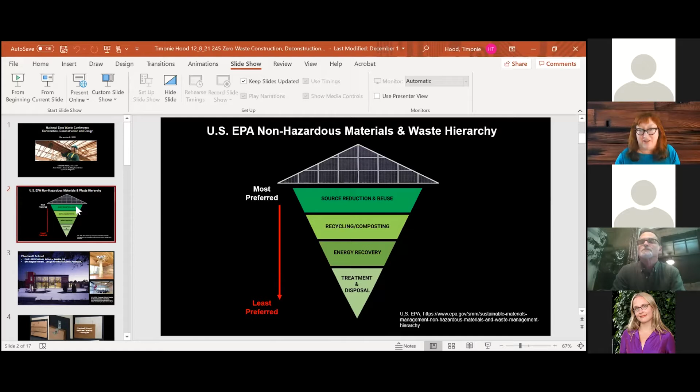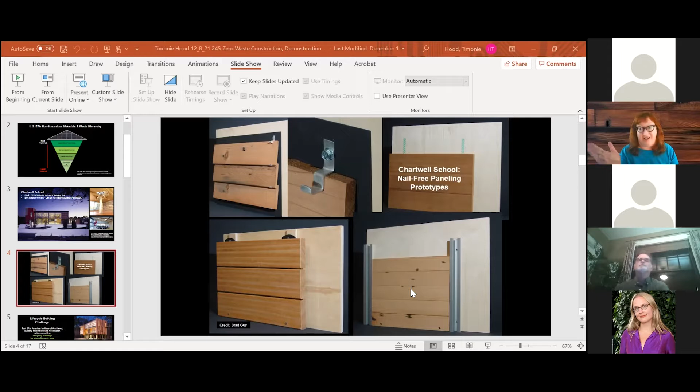Brad Guy, who's a brilliant architect and the founder of the Building Materials Reuse Association, which is now Build Reuse, came up with these ideas for nail-free paneling, because oftentimes the nails become very time-consuming to remove, and they also can damage the lumber. I love this one on top with the adhesive strips where they could just pour an antidote and the wall falls apart. But the system they ended up using, which is very efficient because you don't need many nails or screws at all, is this channelized system.

And we used that handbook to develop a national, and at the end it became an international competition on designing buildings for deconstruction and adaptation. We partnered up with the American Institute of Architects and BMRA, which is now Build Reuse. And the architects and students that participated said they'd never build the same way again.

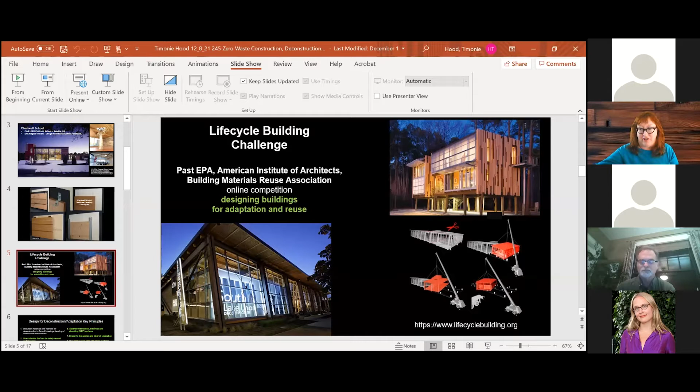The building in the upper right was built on pin foundations, which I think will become more common as we deal with sea level rise and the ability to move buildings. That architecture firm said after running their materials through the greenhouse gas emissions calculator, they'd never build another building the same. The one on the bottom was a building in Seattle called the Pavilion in the Park, and it could be flipped apart essentially and moved as units to other areas. They've taken it apart several times and moved the modules to different places. All of that competition information is still online at lifecyclebuilding.org.

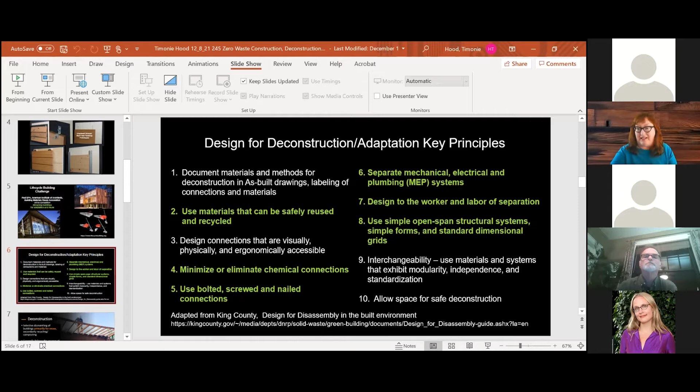So deconstruction can be kind of tricky. What does it mean, design for deconstruction? There's been a lot of great work recently with AIA, but also early on King County and others developed design for deconstruction key principles. A lot of it has to do with having easily accessible connections that can be taken apart, and using safe materials that are high value and can be recycled. So this guidance link, I hope, will help you find out more about design for deconstruction.

Here are the fundamentals for those of you who might be new to this area of deconstruction. It's essentially dismantling a building, so a deconstruction site looks a lot like a construction site. It's primarily for reuse, but it also incorporates recycling and/or composting if there are materials that can't be safely reused or are damaged. Another thing to think about with deconstruction is that it depends on the markets, on the materials in the building, what's going to be reusable.

In many cases, at the very least, pulling out the high value materials, what they call cherry picking, is absolutely appropriate. But sometimes we're seeing 90% plus diversion from deconstruction job sites. And this, of course, reduces the bringing in of new building materials.

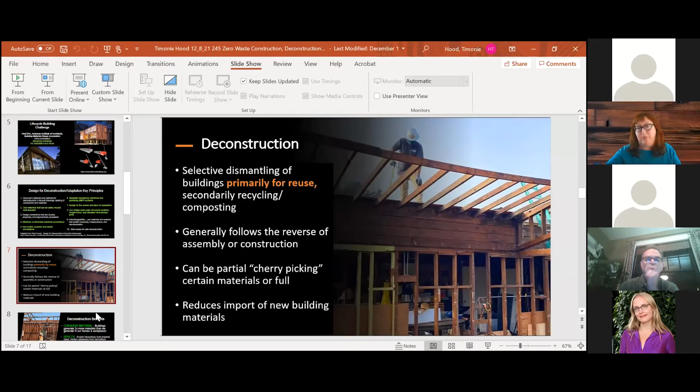So here are some of the amazing benefits of deconstruction. It definitely conserves materials, and EPA estimates that twice as much C&D material, construction and demolition materials, is generated each year than all of what we call municipal solid waste, which is what's generated in our homes, offices, and businesses. So huge quantities of materials. It makes a lot of sense because C&D is so heavy. But the reality is we spend so much time talking about recycling and what goes in which bin, and we may oftentimes be missing entire buildings that are being thrown away.

I think there's also very important work to be shared on the health impacts of demolition, because when homes and buildings are demolished, hazardous dust spreads for blocks, literally blocks, and that gets into people's homes, onto the ground, into the waterways. Deconstruction practitioners have told us that about half the time, even after asbestos has allegedly been removed, they find it under the cabinets, let's say, or inside a wall around pipes, and they're able to make sure it's safely managed. Whereas with demolition, it's not.

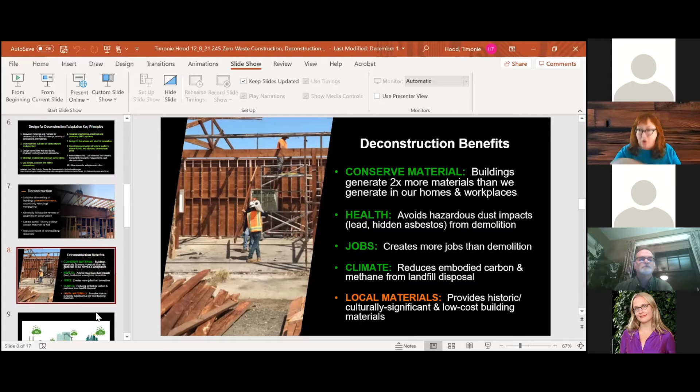It's kind of a common stat out there that deconstruction creates six times more jobs, and those jobs can transition into construction and green construction as well. And then I'm going to talk some more about the embodied carbon climate impacts, and lastly, this local circular economy opportunity to provide low cost, local building materials.

So embodied carbon is a very hot topic, and that means all of the energy and greenhouse gas emissions that went into making, transporting, and assembling a building, versus what you often hear related to climate change in buildings, the energy that the building actually consumes, the operational carbon. As you know, green builders and architects have gotten really good at net zero energy buildings and also at incorporating renewable energy, so what's left is the embodied carbon.

And the government's landlord, the Federal General Services Administration, is calling embodied carbon the next big sustainability opportunity. Just today, the White House issued an executive order on federal sustainability with a focus on embodied carbon. So expect to see a lot more from the federal government, and also many in the green building and architectural world are really focused on these opportunities.

On the deconstruction front, I've been around a long time, and there was a game-changing event in 2016. Portland went out on their own, first in the country, and said no more 'you should deconstruct,' you have to. They passed a mandatory deconstruction ordinance.

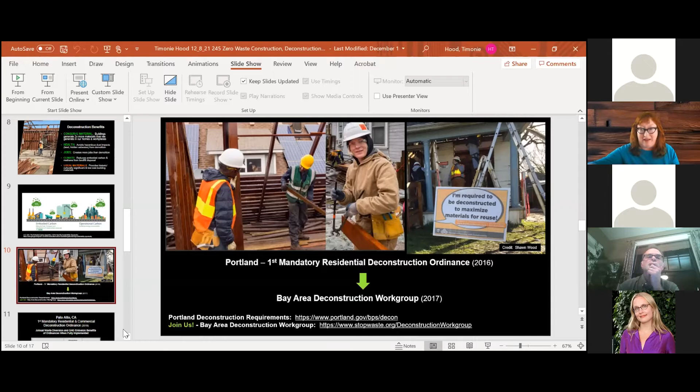It's just been amazing to see the interest and the policy development going on in this area. So expect to see a lot more deconstruction ordinances and policy passing.

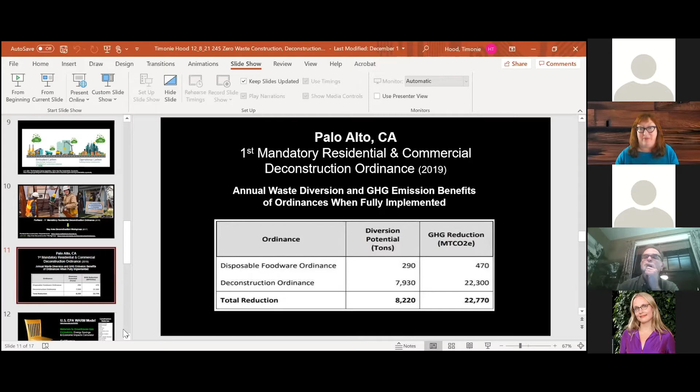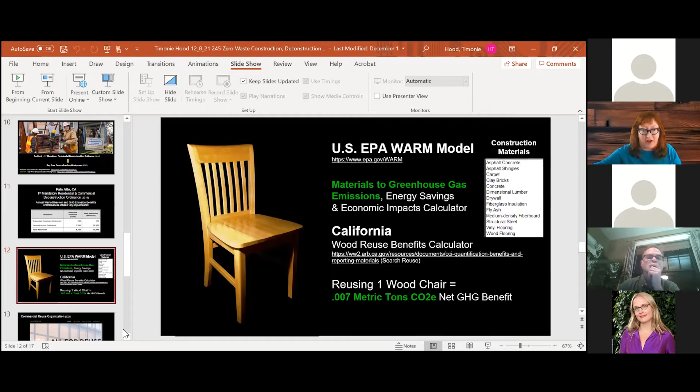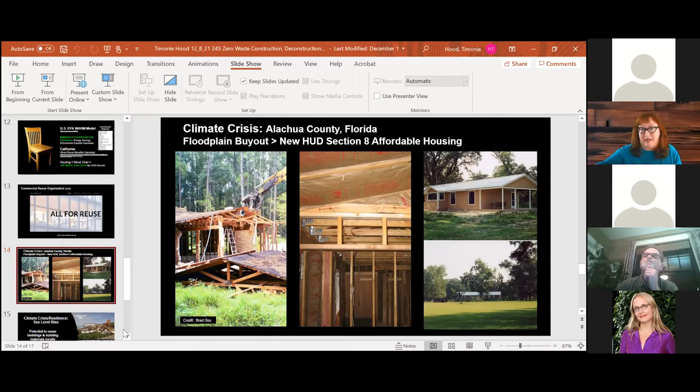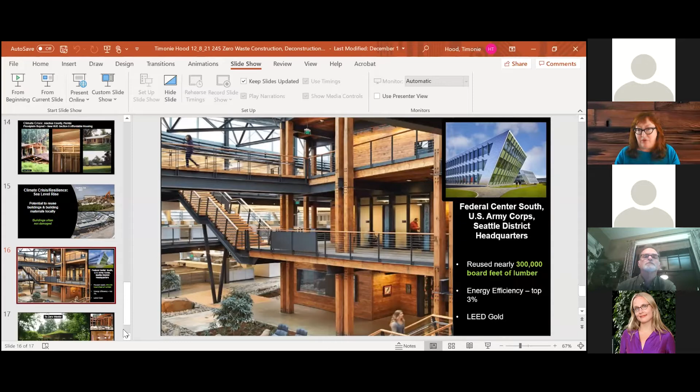I'd like to close out by showing you some beautiful examples of reuse—this is what reuse looks like at scale. There was 300,000 board feet of lumber salvaged from an old warehouse that were used to make the Army Corps of Engineers headquarters building. This is quite a while back, 2012, so this is not something that's a brand new initiative.

And my screen is not going forward here. Let's see, ah, there we go. So why do we need organizations like Build Reuse? And construction junction working on the local level.

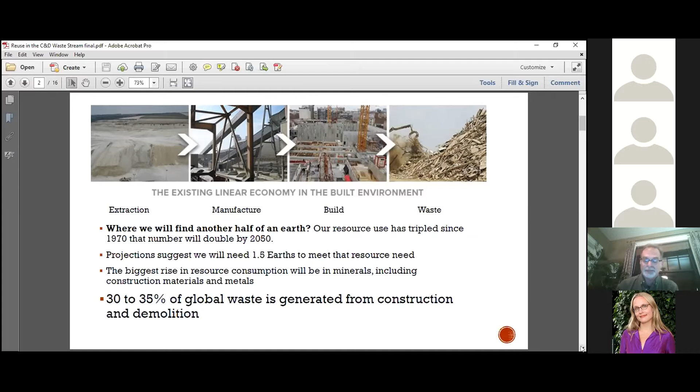So we need to make an adjustment, and we need to make an adjustment to the circular economy. And the concept of circular economy has been really exciting to me as someone who's been involved in the world of reuse for over 20 years, because the central tenet of the circular economy is to keep material in use for as long as possible. And we do that through salvaging, we do that through maintaining, we do that through repairing and remanufacturing. And sort of the bottom of that hierarchy, it's important, but the bottom of that hierarchy is recycling.

And C&D recycling, we're trying to maximize weight. In reuse, we're trying to maximize value. Recycling C&D material is dealing with the really heavy stuff, the concrete, the asphalt, the materials and volume, whereas reuse is really focused on the building material components: doors, windows, plumbing fixtures, lighting, flooring, even down to office furniture and filing cabinets and things like that.

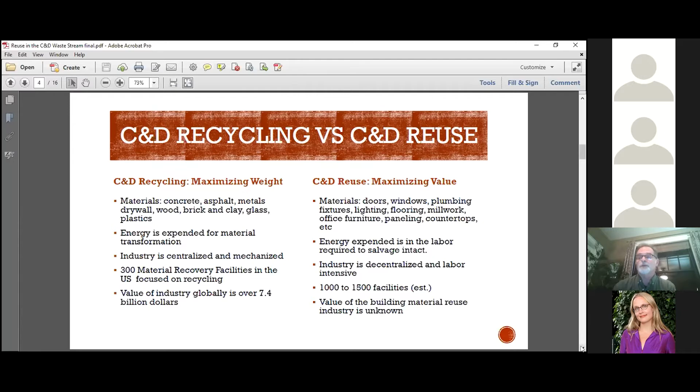We don't really know what the value of the building material reuse industry is. We don't know what's the value of doors that are resold in the United States every year, or the value of doors that we're missing. What value is going into the landfill? We don't have good data around that.

I'm showing this slide to show you the difference. We have really good data on how much concrete is landfilled versus how much concrete is actually recycled and has another life as another part of the product. We know the big stuff. We just don't have good data on what's happening in the building material reuse industry.

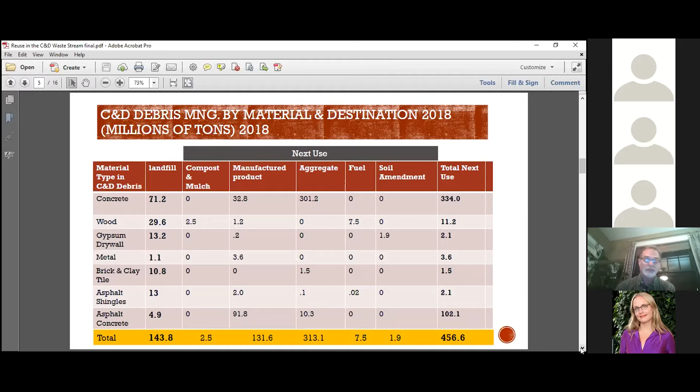And if we don't know the value of that industry, we can't advocate for it. It's difficult to raise funds for it. It's difficult to get ordinances passed. We really need to focus on getting value on this stream.

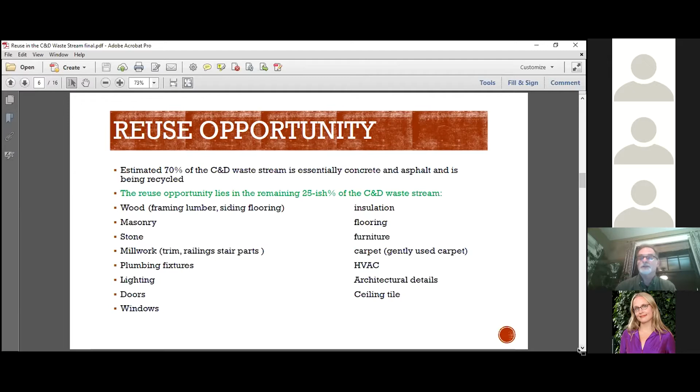When we talk about the reuse opportunity, we're talking about that 25 to 30% of the C&D waste stream that's not concrete and asphalt. Again, plumbing fixtures, light fixtures, doors, windows, insulation, all of the kinds of materials that you will see at organizations like Construction Junction that are nonprofit reuse retailers dedicated to promoting the reuse of building materials.

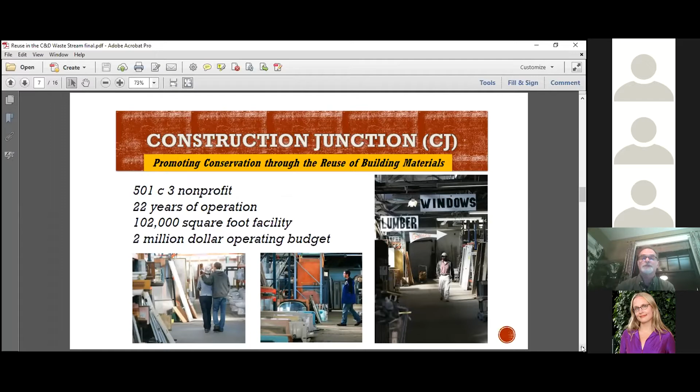We're a nonprofit organization. We've been around for 22 years. We've got a 102,000 square foot facility and a $2 million operating budget, so we can tackle pretty big projects.

The core programs that are part of our operation—the primary core is diversion of used and surplus building materials. We do that through offering a free pickup service. You can drop materials off at our facility. We're open 7 days a week. We also have a deconstruction crew, which Timothy did a great job of showing you some examples of. We fund over 80% of our budget through our public retail sales of donated building materials.

We also have an expanded infrastructure for other reuse and recycling partnerships. We've got operations in our building that recycle bicycles and art supplies. We have a commercial door reuse business within our operation. We have a couple of job training partnerships. Because reuse is so labor intensive, we have a program with Goodwill Industries where folks with disabilities are managing all of our doors and banding all of our tile. We also have a partnership with another community organization that provides deconstruction labor for jobs where we need to ramp up—bigger jobs than our standing 3-person crew can handle.

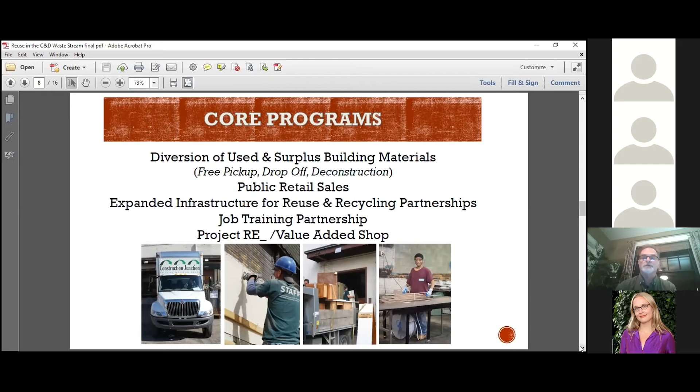What are the impacts of a store like Construction Junction? In 2019, we sold over $1.8 million of salvaged and reused building materials. Our employment opportunity fluctuates between 27 and 32 people. Those don't include our job trainees, which could be 10 to 12 people at a time. We had almost 50,000 customer transactions with about 225,000 items sold.

We processed over 6,000 donation receipts, 20,000 hours of paid training. We also have an inventory system for our organization, so we can track what comes into the building, who donated it, and what we sell. We don't track things by weight—we actually track things by item, so you can see some of the impacts of the materials, how many things we've actually kept out of the landfill through sales.

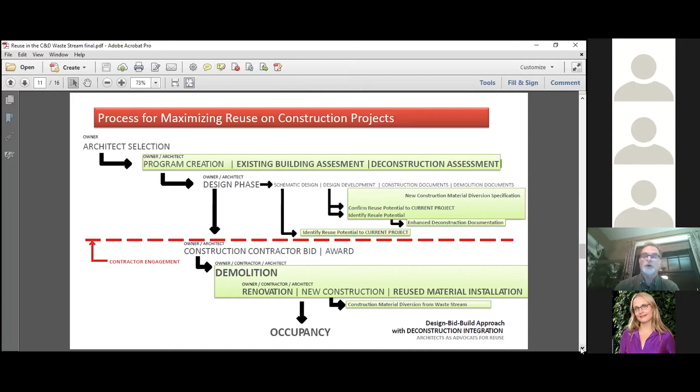They're letting owners know that they can donate materials for tax deduction, that we have the opportunity for deconstruction, that we have a free pickup service, that we can come through and make material lists for the owners so that we can help them manage that material, so that we can help architects create specifications so that everybody on the job site knows that Construction Junction's coming onto the site - here's when they're coming, here are the materials that they're taking. This is a really critical component of working on these larger scale projects.

I'm not going to go through the specific details again, just want to let folks know that I've outlined the key challenges for owners in a lot of these projects, and what are the benefits for owners to be involved, key challenges for architects, and also how to make architects aware that there is the opportunity for Construction Junction to come and reuse materials, and work, and their role in making sure that this happens.

Same things with key challenges for contractors, scheduling us being on the site, scheduling deconstruction, scheduling material pickups. Who's doing the work on the job? Is it going to be Construction Junction? We're not a union shop, so sometimes we've got to work with local unions to actually pull material, and then we come and pick that material up. So all of that has to be coordinated. We've been really successful doing that kind of coordination with the University of Pittsburgh, for example.

The last part of this that I want to talk about is the importance of innovation in the reuse retail world, the facilities that do building material reuse. One of our signature programs that Stephanie was also mentioning is Project Re. This project reuses materials, rebuilds communities, and restores lives. It specifically works with architecture students on design build projects and exposes them to doing design and build work with salvaged and reused materials.

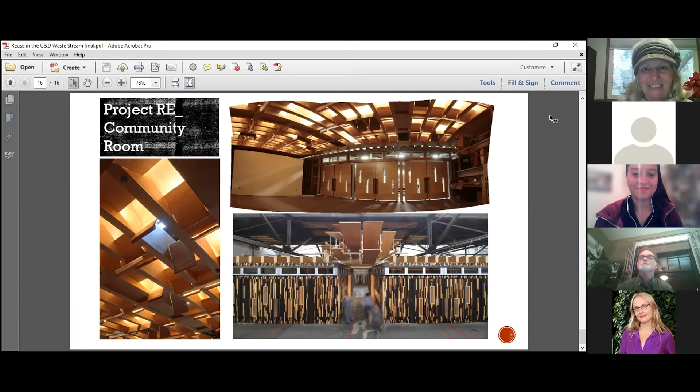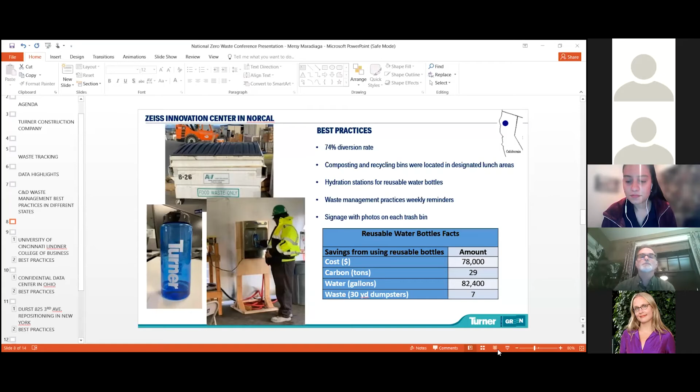Mike, you might need to stop sharing. How's that? Great, and now Mersy can share her screen. Terrific. Let's see, Mersy, I think you need to hit slideshow or full screen. Oh, okay. There you go, fabulous. Can you see my slides? Yes, looks great. Okay, perfect.

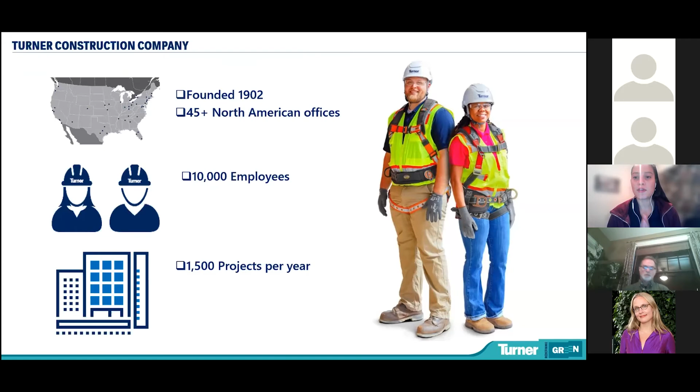Okay, so on today's agenda, I'll be talking about waste tracking at Turner Construction, some of the data highlights, and waste management practices in different regions around the nation. To give you a little background about Turner, we were founded in 1902. We have over 45 offices in North America with 10,000 employees, and we implement about 1,500 projects per year, ranging from stadiums, airports, hospitals, schools, from renovation to ground up, working with clients on the private and public sector.

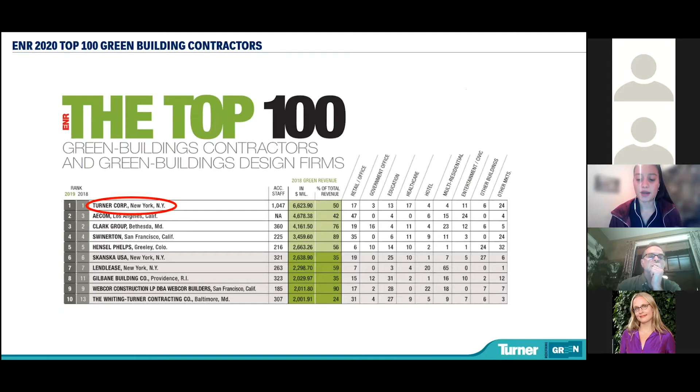A fun fact about Turner is that for the last 14 years, we have ranked number 1 green contractor per ENR, and this is the latest report on 2020. We really take sustainability practices to heart, and one of the sustainability practices that we'll be talking about today is our waste management practices.

Our waste tracking tool is called Turner Tracker, where all of the projects around the nation are required to input all of their data onto the system so that we can see how we're doing as a company. Through this website, we're able to input waste management for each project, where we input what the expectations are towards the haulers. Each hauler is required to input hauling tickets into the website, and a Turner representative gets the chance to either approve or reject them.

From here, we also get the chance to convert tonnage to greenhouse gases so that we can understand the impact that we make as a company. These calculations are done using the EPA WARM model. For the past 15 years, we have had the commitment to reduce 50% of the waste materials that goes into the landfill.

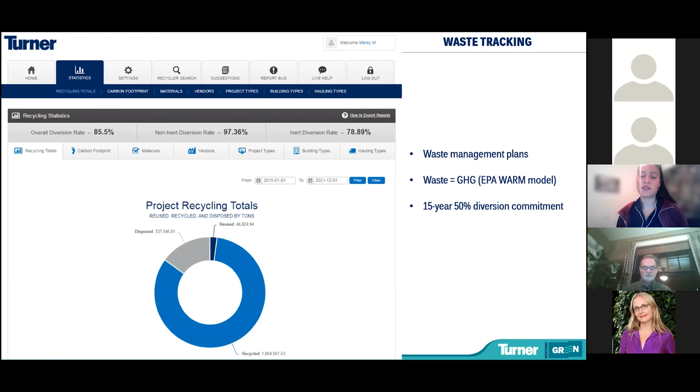Some of the data highlights that we have been able to discover through the use of tracking our waste data has been that 2 million tons of greenhouse gases have been saved. To put it into perspective, that's as if we were to have stopped driving 435,000 cars for 1 year.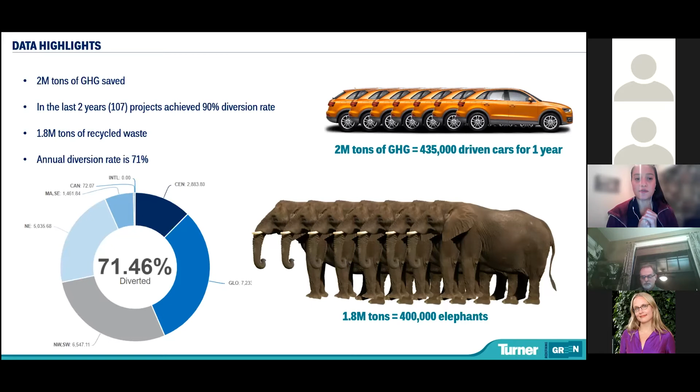In the last 2 years, we have also achieved 90% diversion rate and higher for 107 projects around the nation. We have also recycled 1.8 million tons of waste, which is as if we put the weight of 400,000 elephants. This has led us to achieve 71% diversion rate overall.

Now, when we think of waste, we know that waste differs from region to region, from state to state, and even city to city. But we have noticed that waste can be dealt with, and we can achieve zero waste practices with the same practices, basically. So I'm going to walk you through different projects at Turner in different regions that have achieved really well with best practices. I'll be starting with a project in Northern California, where we achieved 74% diversion rate by focusing on composting and recycling.

We decided that it was important for us to communicate with the trades on weekly reminders, where we specifically stated where we placed all of our trash bins in the lunch areas, and specifically noted with photos what could and could not go into each bin.

At this project, we also implemented a pilot program where we decided that we wanted to reduce the amount of single-use water bottles that were going into the landfill. So we installed portable hydration stations, and we gave reusable water bottles to each of the workmen in the job site. By doing this initiative, we were able to save $78,000, which also related to carbon savings.

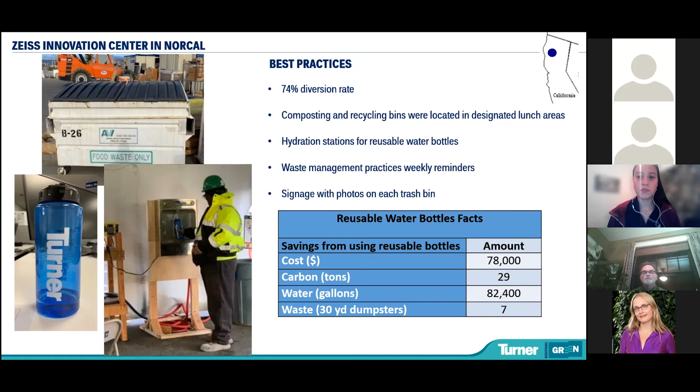Next region is in Cincinnati, Ohio, where the project was able to achieve 95% diversion rate. This was done by focusing on recycling 100% of concrete and steel, as well as reusing pallets, wire spools, and dunnage. We also understand that it's important for us to minimize the amount of commingled waste that is contaminated. One of the initiatives that can prevent that is by separating municipal solid waste and construction and demolition waste. By doing these practices, we were able to save 4,700 metric tons of carbon dioxide, as if we wouldn't have driven 1,000 cars for 1 year.

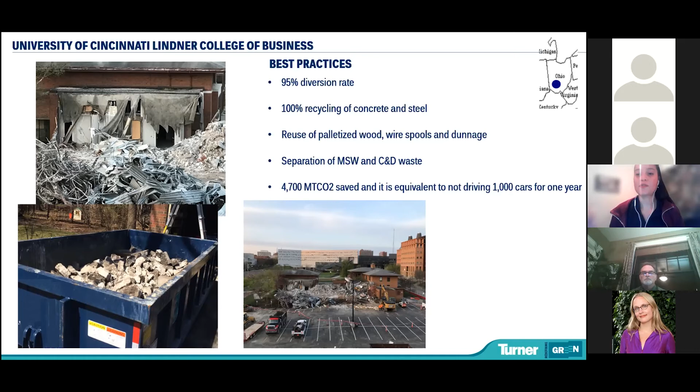Next region is a confidential data center in Ohio as well, where we achieved 95% diversion rate by source separating 7 materials, where it was easier just because we had enough space to do so. We were able to achieve this again by constantly communicating with our workforce and sharing multiple logistics maps of where exactly each of these dumpsters were located.

We also were able to create a close relationship with the hauler and the sorting facility, where the Turner team visited the facilities and were able to learn what happened to the waste the moment it left the job site. We also saved $50,000 by closing the loop on the concrete that was coming out of the job site by crushing it on site, where when we finished crushing it, we used it for the foundation that went into the same building.

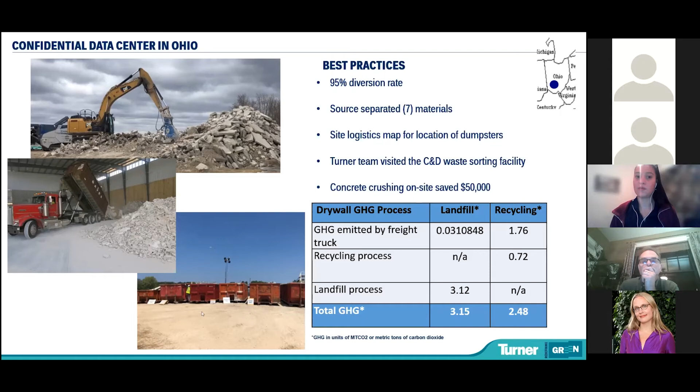We also wanted to close the loop on drywall, and we faced a little challenge because the closest facility found to Ohio was in Pennsylvania, about 400 miles away. We were thinking, is it really worth it for us to recycle if by driving it we would emit more greenhouse gases? So I did a little study to find out what the greenhouse gases would be if we sent it to the landfill versus recycling. To my surprise, we found out that still recycling and sending the drywall 400 miles away from the job site emitted fewer greenhouse gases than sending it to the landfill that was only 28 miles away from the job site.

Next project is in New York. The reason to highlight this project is because, as we already know, downtown areas tend to be very congested, and one of the complaints we hear often is that source separation can take a lot of space and that it's complicated. Well, this is an example that it could be possible.

So what the project did was basically require each subcontractor to bring mini bins to separate their own material. These mini bins were strategically placed throughout the job site, where the 30-yard dumpsters were only brought into the job site to fill it in when the mini bins were already full.

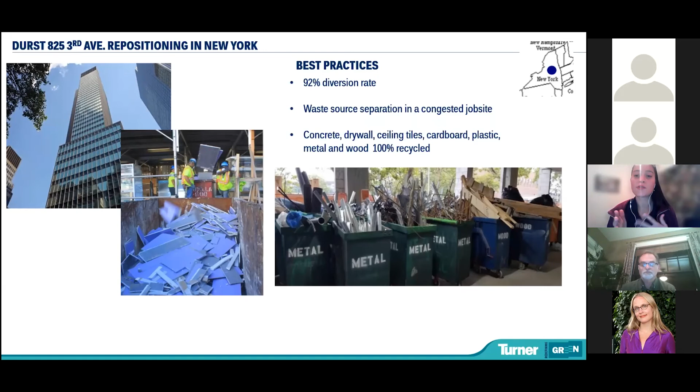Then later we had the laborers dumping the mini bins into the 30-yard dumpster. This allowed us to strategically place the mini bins in other areas to allow for better space and to only have the 30-yard dumpsters when they were necessary. This allowed us to recycle 100% of concrete, drywall, ceiling tiles, cardboard, plastic, metal, and wood.

The other project is in Florida, where they did an excellent job at communicating and training the workforce on the waste management practices, by training the workforce specifically on what was acceptable and not acceptable on each of the source separated bins.

This allowed us to understand what the haulers' needs were so that we could, as a contractor, help them achieve better recycling rates, and as a return, fulfill our commitment to reduce 50% of the waste that went into the landfill. The project was able to communicate these ideas by displaying logistics maps that specifically showcase where the dumpsters are located.

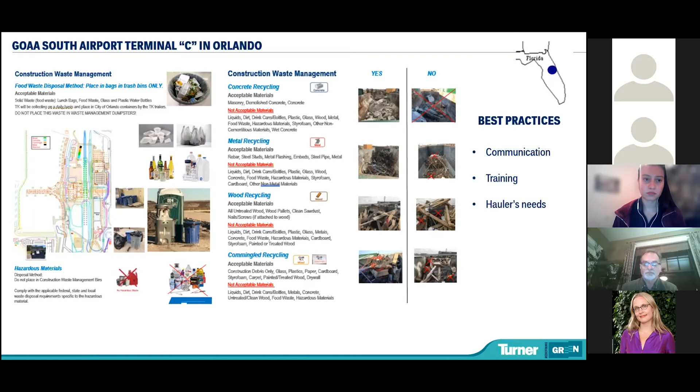And the key takeaways of all of these best practices as a contractor is to understand that waste can be managed differently across the country. But as mentioned before, these initiatives are basically the same.

It is important for us to work as a team, constantly communicating with the haulers and understanding what their needs are, and minimizing the contamination that we send into the landfill to maximize recycling. And we can do the minimum by easily separating municipal solid waste and construction waste. Basically, this concludes my presentation.

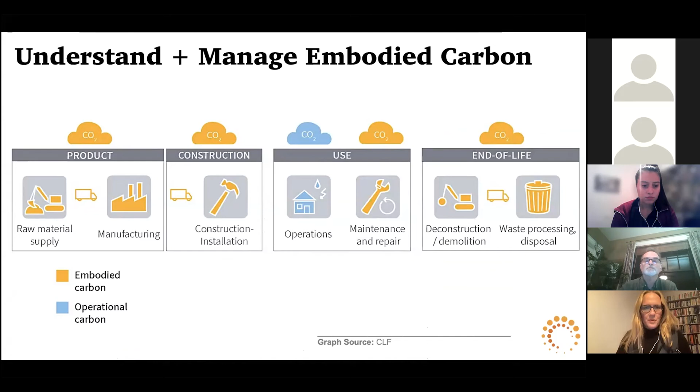And in looking at environmental product declarations, I think everybody's getting a lot more familiar with embodied carbon and understanding what embodied carbon is in relation to operational carbon, which has been maybe a little bit more familiar to people over the years. I find this diagram from Carbon Leadership Forum to be really helpful on that front.

And then through the Recycling Certification Institute, really getting to a place where we can trust the data that we get from our recycling facilities. A lot of times that's traditionally been much more artistic than scientific. And in order to really make improvements, it's extremely important to be able to trust that data and know that it's valid.

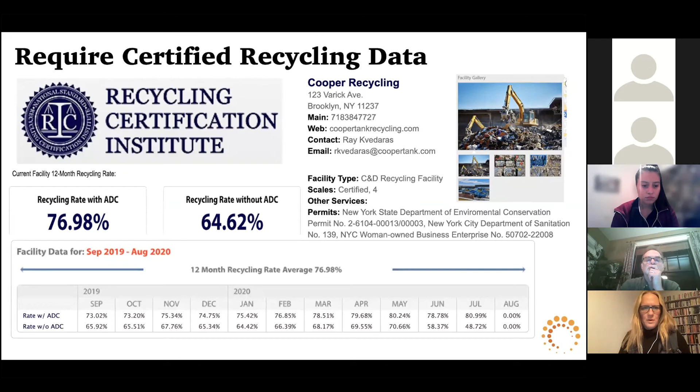So we're asking for RCI certification from recycling facilities wherever possible. That's much more commonly available, like in areas like the Bay Area. In some areas like New York City here, we have only 2 facilities within reasonable distance from a lot of our projects that are RCI certified. So we're hoping to increase the number of those facilities with those certifications. We also work with building owners to drive some of the changes that we want to see in our material supply chain and in reuse.

But then in order to actually make these changes, we work a lot with manufacturers, construction management, our design teams, and everybody else that needs to be involved, from government folks to recycling facilities and a number of other team members. So with regard to deconstruction and reuse, I'm not going to spend a whole lot of time on this.

Because I think this was well addressed by Mike and Timony. But I think what's kind of key here thematically is that deconstructing enables us to, first of all, reuse a lot more than we would be able to otherwise, but it also fosters better recycling rates down the line too for items that can't be reused.

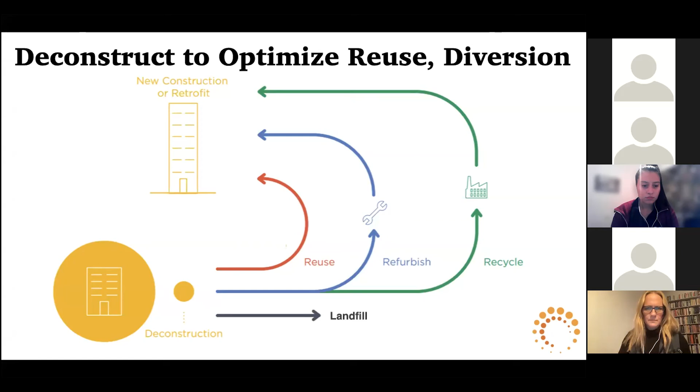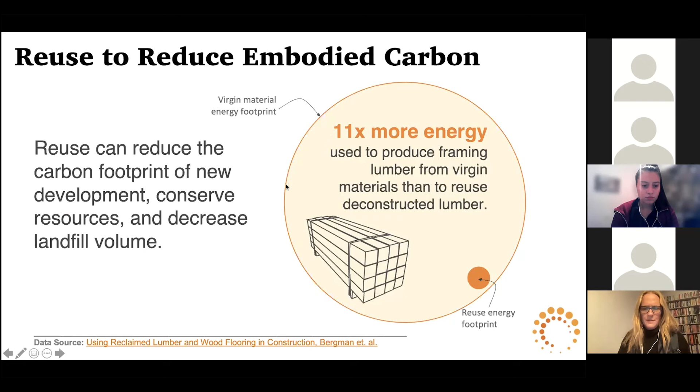So also we find that when we reuse, we're certainly lowering the embodied carbon as exemplified through this statistic on wood. And we also know that we're improving on a number of other fronts.

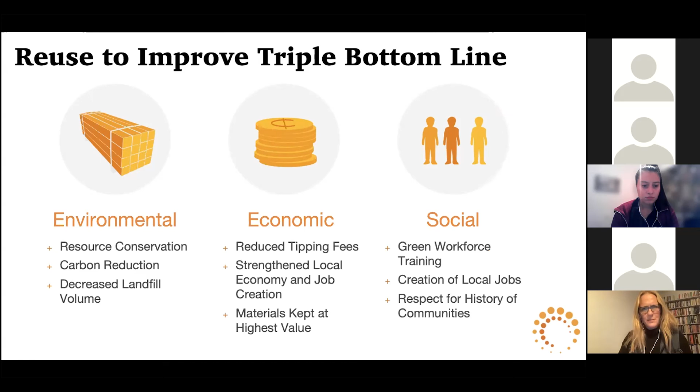There's a lot of improvements to be had through workforce development, just culturally a respect for the history of a place and the materiality of the vernacular of that place, reduce tipping fees on the economic side of things, and just savings to be had through the careful management of those resources.

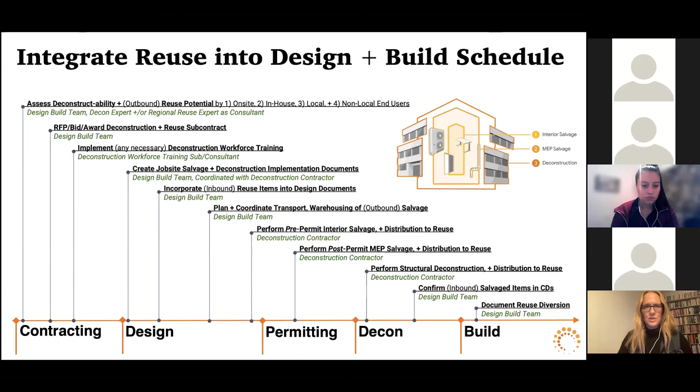And a lot of this is just a logistics question. So how do we integrate reuse into design and build by looking at our project schedule early enough to ensure that we integrate it at the right milestones throughout the overall construction process, whether that be a remodel or a full building deconstruction and rebuild. And it's, again, it just comes down to careful planning.

So we've been looking also at mapping out across the US in particular, where our reuse ecosystem is looking like. Yarden Harari from CRTKL was doing this with a group of folks at Building Green as well. And so we joined forces, and we're working on establishing a map and matrix that should be live and linkable to a lot of different sites, including on the Alpha Reuse site, hopefully on the Build Reuse site, and a number of other places in early 2022. So keep an eye out for that.

So I'm going to talk a little bit about drywall source separation and closed loop recycling. In considering, in really looking at the whole system, as I was mentioning at the beginning, we understand that whenever we send drywall to landfill...

It causes a real problem for the communities around those landfills in a lot of cases where you have anaerobic conditions and humid conditions, which is a lot of places around the US. You get hydrogen sulfide gas generation, and that is an asthmagen and can also cause other health issues. But it's something that a lot of times people don't know when they're making decisions on a construction site, but it's something that's really important to factor into the overall rubric for how we make decisions about where we send materials.

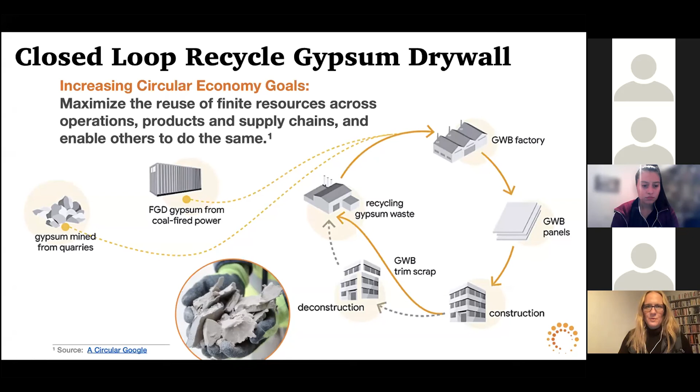And so we're looking a lot at how do we drive some of the improvements that we want to see with our manufacturing community and with the recycling community. And so we've written letters to voice the interest in source separating material from our job sites to make it easier for that recycling back into drywall, to reduce the contamination that happens.

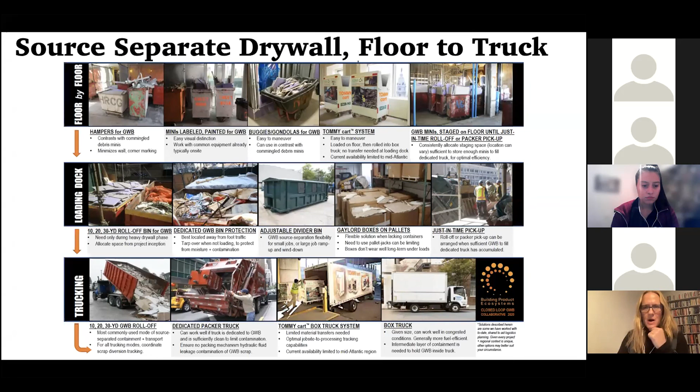So speaking of logistics, this is a one-pager that we put together to broach how to do source separation on the floor by floor, taking just examples from a number of different projects over the years. And then in the loading dock, source separation via 30 yarders in some cases, and then via trucking, using anything from dedicated packer trucks to 30-yard or 20-yard roll-offs to box truck situations. And so that's been helpful for a lot of our teams.

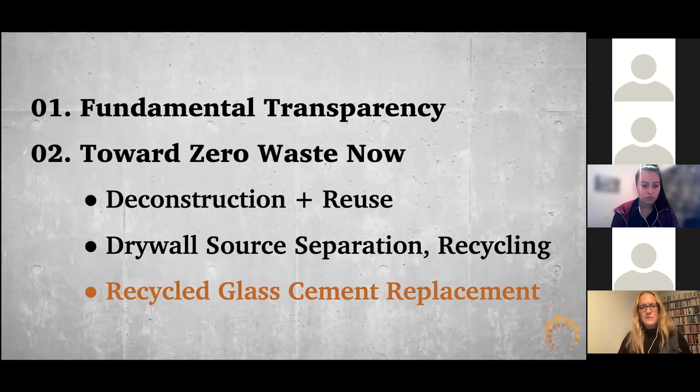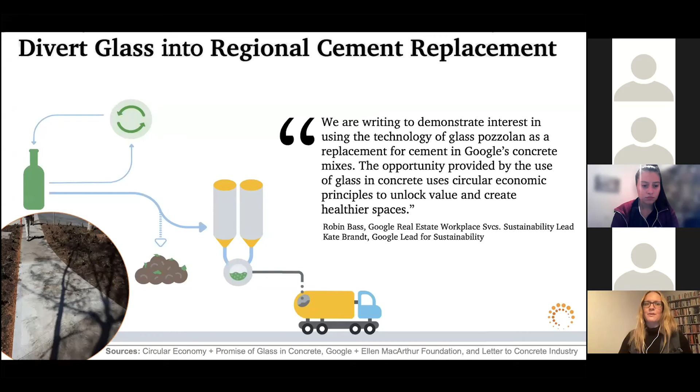So last, I'm going to talk about replacing some proportion of cement in concrete with recycled glass, kind of merging municipal solid waste and C&D in this solution set. There's a lot of building owners that have been looking to optimize concrete for a number of different reasons, really looking at lower carbon concrete.

Cement is the huge exacerbator of global warming potential in concrete. And as you can see on these diagrams here, though it's only between 10 and 15% of the mass of concrete, it's responsible for about 80% of the global warming potential of a concrete mix. I think we all know it has a huge impact overall when considering all the different CO2 impacts around the world.

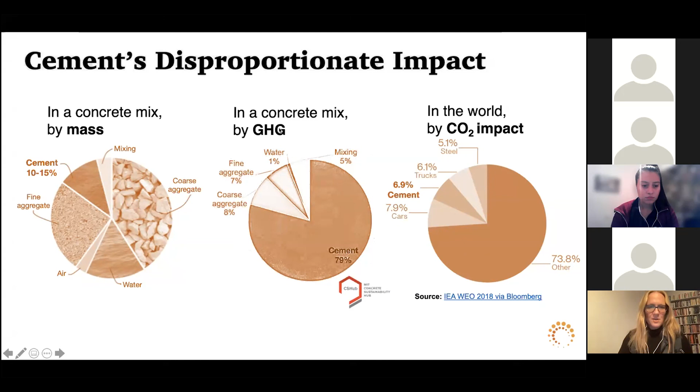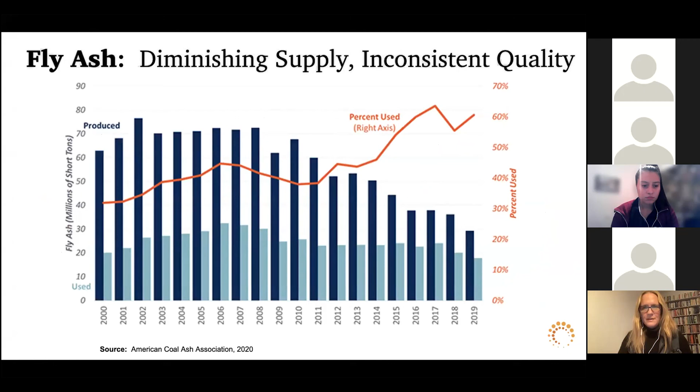So frequently we're trying to replace that cement content with other byproducts. Traditionally, that's been fly ash and slag. Fly ash is diminishing, though we're harvesting fly ash from storage ponds, it's still diminishing in availability, needing to be replaced with other materials in many places. Same thing with slag - we have less and less steel and iron production in the U.S., that's having to come from further and further away, and prices are increasing for slag.

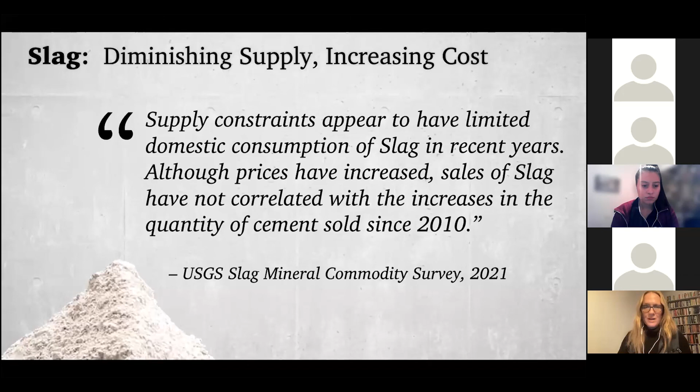So we do consistently have a steady glass supply, for better or for worse. A lot of times glass isn't getting recycled otherwise. When glass goes through a sorting facility, in a lot of cases the smaller particles of glass, even if you want to recycle that back into bottles, can't be color sorted for that purpose. So it can be synergistic with bottle glass recycling.

But as you can see from this diagram, from Oregon DEQ and this really great resource they just published, this waste impact calculator, in many cases it can actually be more beneficial to recycle into pozzolan, from the perspective of global warming potential.

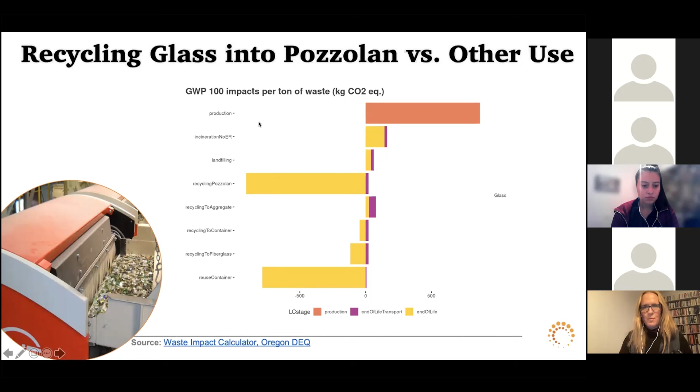So we have needed to engage again with a number of different entities - our engineers, municipal recyclers, batching facilities. There's a lot of inertia in the concrete industry, and there should be. We have to be really careful with structural materials. So to make a change, we have to be very careful and do a lot of piloting and testing, which we've done a lot of over the last 10 years.

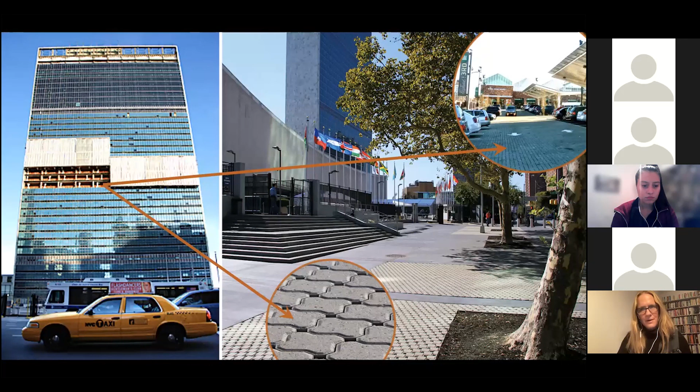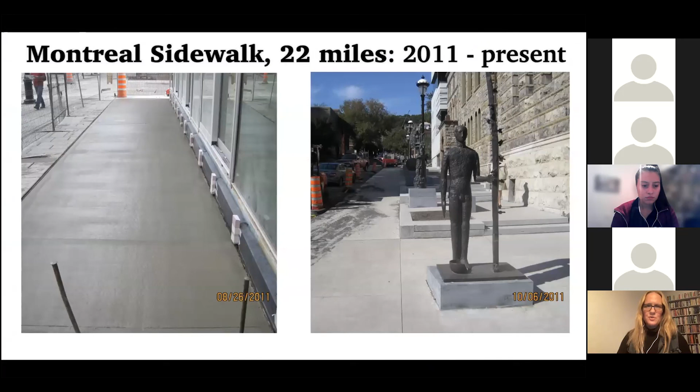This glass can come from bottle glass, but it can also come from window glass retrofits. So we started utilizing glass as a cement replacement with partners in a lot of precast materials like pavers and concrete masonry units. Moved to sidewalk - Montreal was a leader on this since 2011, and they've poured 22 miles of sidewalk with glass cement replacement.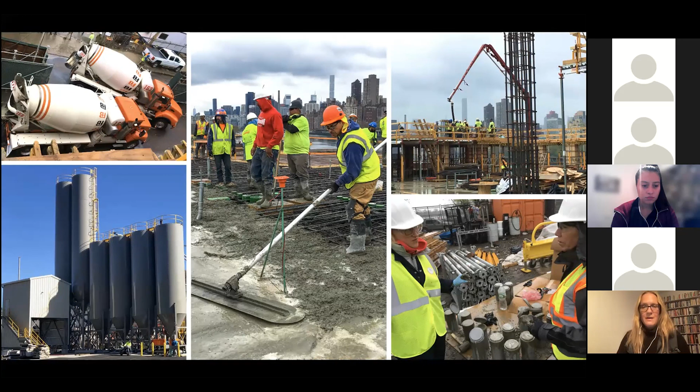So just to wrap up here, this just shows some pictures of implementation at scale. There's a full-scale processing facility - by processing, I mean cleaning and grinding of municipal recycled glass to be ready for use in concrete. Some of the projects it's been used on, and that's it.

Great, thanks so much, Amanda. What I really appreciate, Amanda, is that she takes a very scientific, factual approach in bringing all these stakeholders together. Like she says, we're talking about integrity in our roads and buildings and everything, so it's really where the rubber meets the road. So thank you so much.